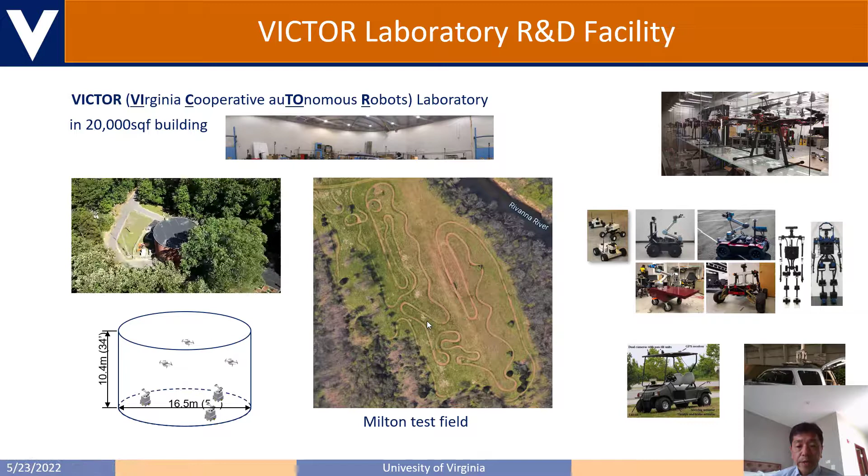Today's talk, I will start by introducing the history and the state of the art of autonomous driving, and finally address the limitations of the current autonomous driving technology.

Following that, I will say why road surface measurement is important for autonomous driving. Structure from motion-based road profiling, a road surface measurement technique, is what I proposed and developed with my graduate students.

I will also present the autonomous defect identification techniques, which we developed using the 3D reconstructed images from the preceding technique. Finally, I will present autonomous driving using road surface measurement.

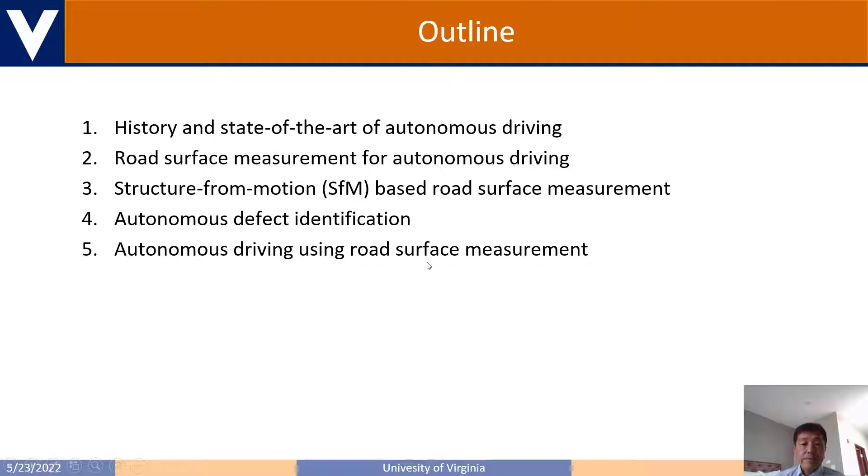So autonomous driving is booming, but in fact it is not new.

By 2000, Komatsu had already introduced the autonomous mining truck into the market, having started the project in the early 1990s. Of course, this is GPS driven.

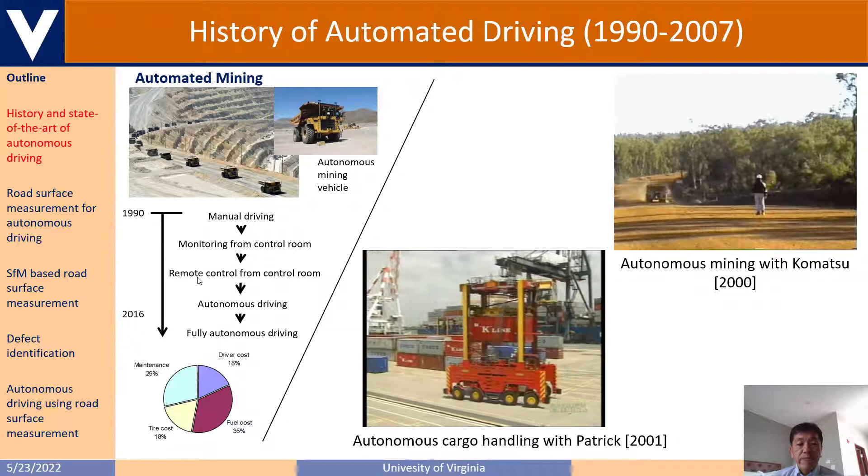It is not fully autonomous, but the idea existed, and there was also advancement. For cars, the technology has been progressing under the name of ADAS.

Lots of technologies, starting from cruise control, adaptive cruise control, automatic emergency brake system, lane keeping assist system, traffic jam assist system. Many technologies have been developed and implemented.

In 2007, the well-known DARPA Urban Challenge was held. Virginia Tech, which I mentioned before I came to University of Virginia, became third in this challenge.

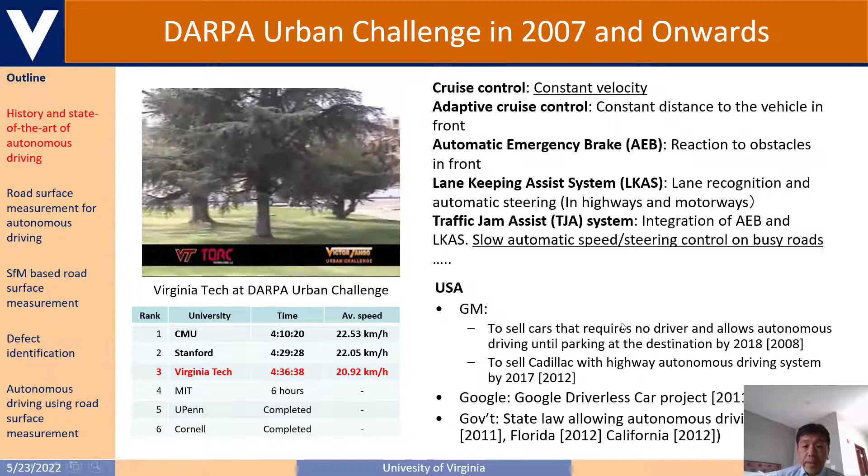And after this 2007 competition, General Motors announced that they would be selling cars requiring no driver, allowing autonomous driving until parking at the destination, by 2018. Of course, it didn't happen, but that's how the autonomous driving boom started.

Needless to say, Google and other IT companies started to join this development, and even the government started to support the development.

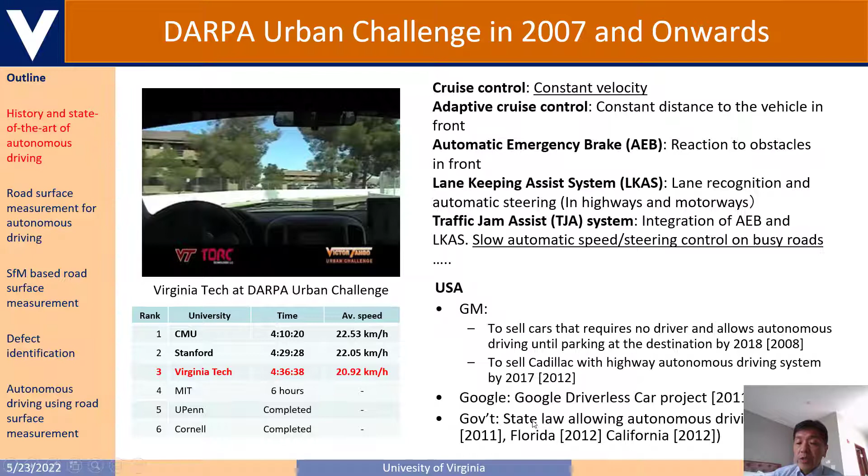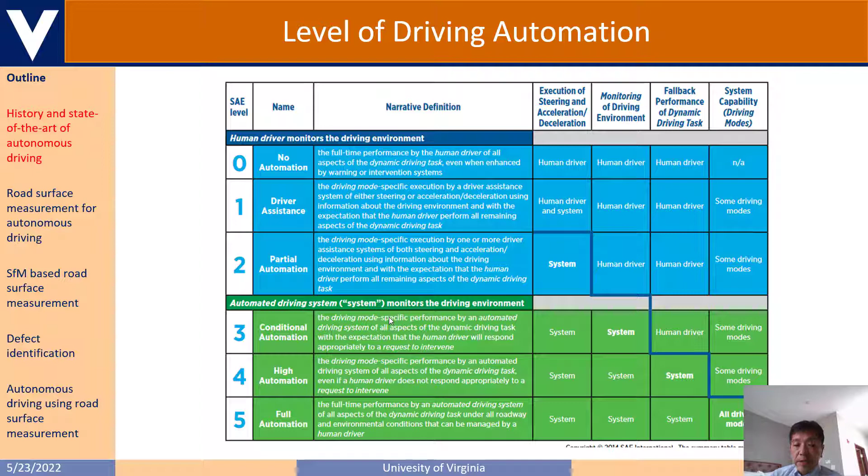I'm here showing the levels of driving automation, and we were really discussing up to level 5. We do not really know where we are at this moment, because achieving autonomous driving in the whole scenario is extremely challenging. There were exaggerated discussions, and now we've started to tone down a little bit. This is also good because we did not know whether we could achieve autonomous driving that fast.

Although we have not been able to achieve fully autonomous driving at all, there has also been progress. But if you observe by dimensions such as what I'm showing here - GPS difficulty, environmental complexity, and speed - what we have been able to demonstrate so far are relatively easy problems.

The reason why we don't see autonomous driving everywhere is because the car moves to all places. The environment could become very complex, or it could even go into tunnels where GPS is not available. For this reason, we are still not close to achieving autonomous driving.

I'm also showing here the environmental complexities in snow and rain. The scene that the camera can see becomes completely different, and we need more sophisticated techniques to perceive the environment.

Industry is taking an approach of conservatively solving one problem after another. As an academic faculty, what we are trying to do is see what technology is going to be needed in the future.

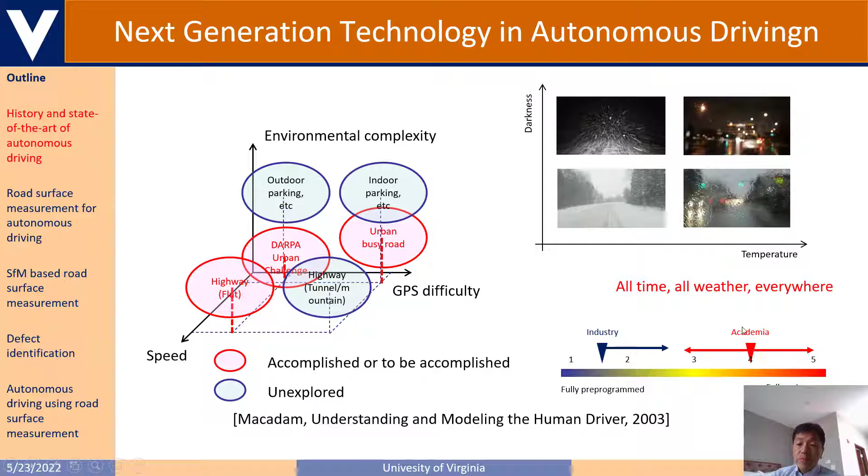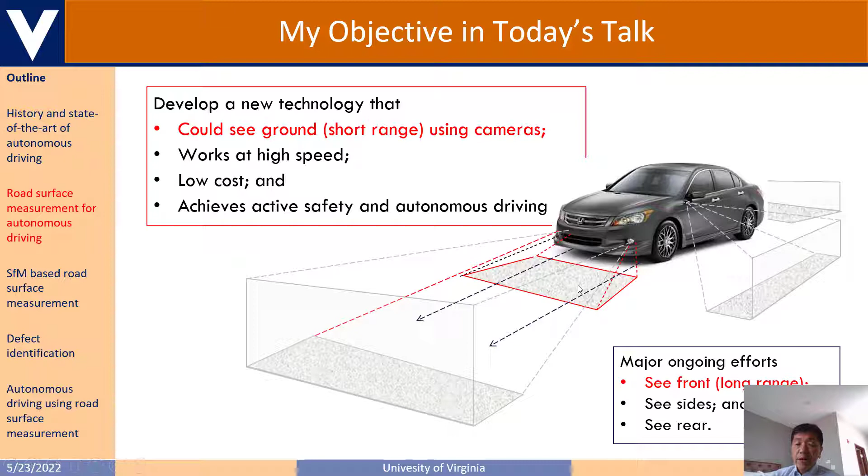So today I'm talking about road surface measurement - that is also one of the things we need to address as technology advances. The clear difference between what industry is doing and what I have been doing is that industry just tries to see front, long range, while what I'm trying to see is the road surface. Seeing the road surface was quite important because cars are in contact with the road, and the performance and safety of the vehicle is heavily dependent on the road surface.

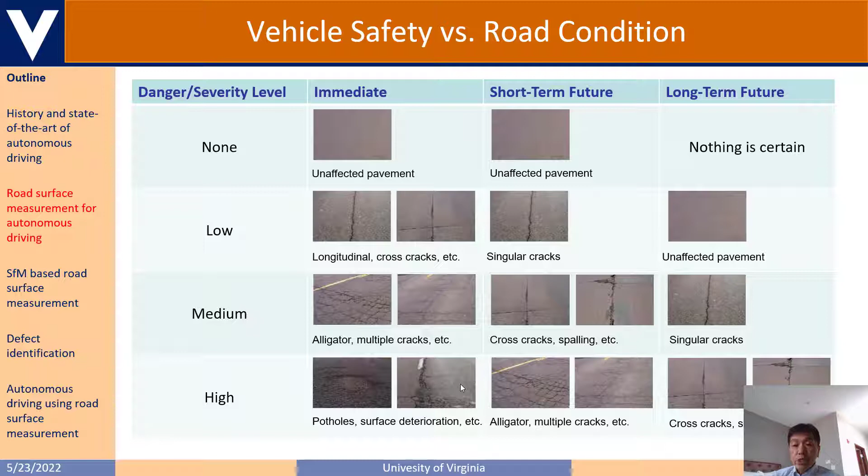So I'm here showing vehicle safety versus road condition. These conditions, of course, change with respect to time, and ultimately ill conditions could cause traffic accidents, risking the life of humans. So obviously we have to be able to detect this so we can repair the road, and at the same time we have to be able to avoid such dangerous conditions.

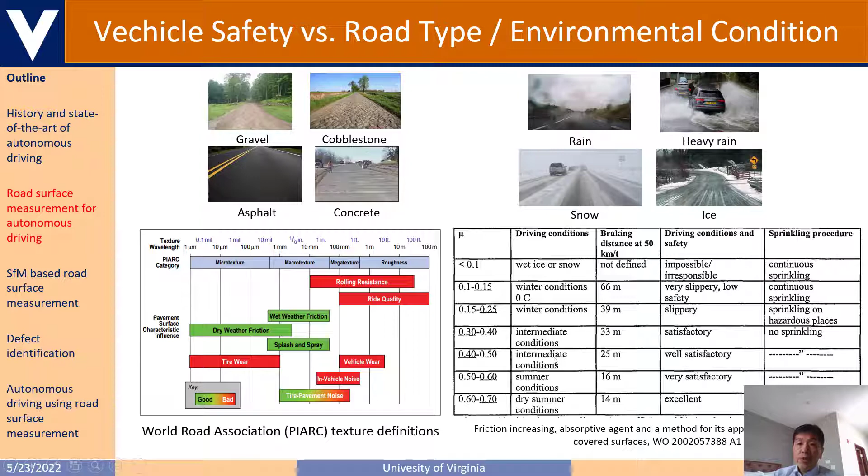It is not only road conditions, but also road type and environmental conditions that affect vehicle safety. On the left-hand side, we see gravel road, cobblestone, asphalt, concrete - each one has a different friction coefficient, and therefore vehicle performance changes. If you also consider rain, snow, or ice, it's not only the dynamic friction coefficient but many parameters that change. For example, the friction coefficient is less than 10% of normal when we see ice or snow on the road.

So identifying road condition and road type is quite important, although current autonomous driving is not focusing on it. Humans identify road conditions using indices that have been developed, and based on this we repair the road or even judge its safety. When we try to do autonomous driving, the robotic vehicle must be able to identify what a human is able to do. So we are using what has been developed to improve our autonomous detection systems.

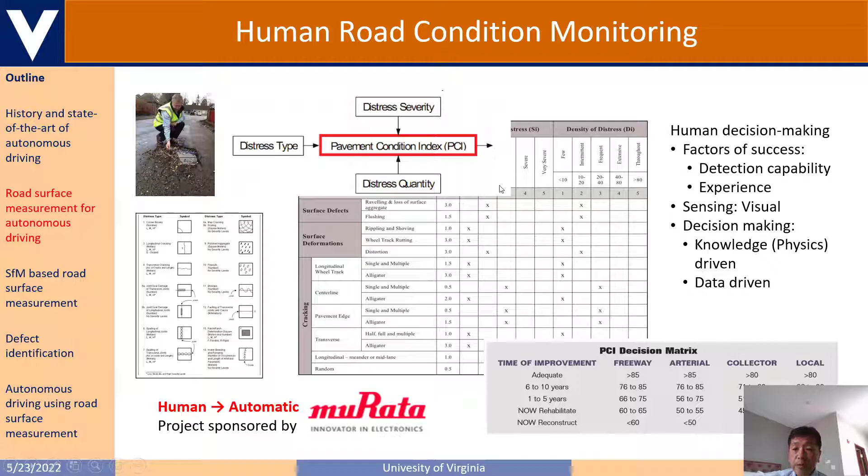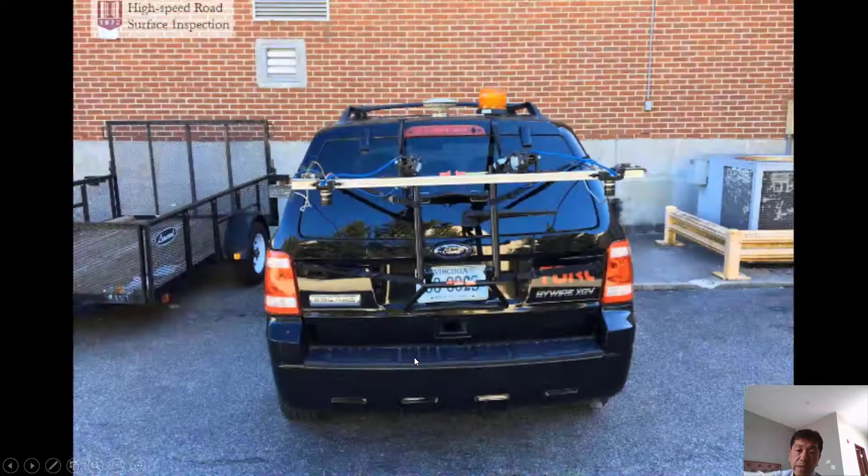Here is the work that I started at Virginia Tech, before I came to UVA. Here we have two cameras attached at the rear side of the vehicle because we are trying to do 3D reconstruction of the road offline. In the case of a highway, where we drive the vehicle at 65 miles per hour, what we see mostly on such a road are potholes.

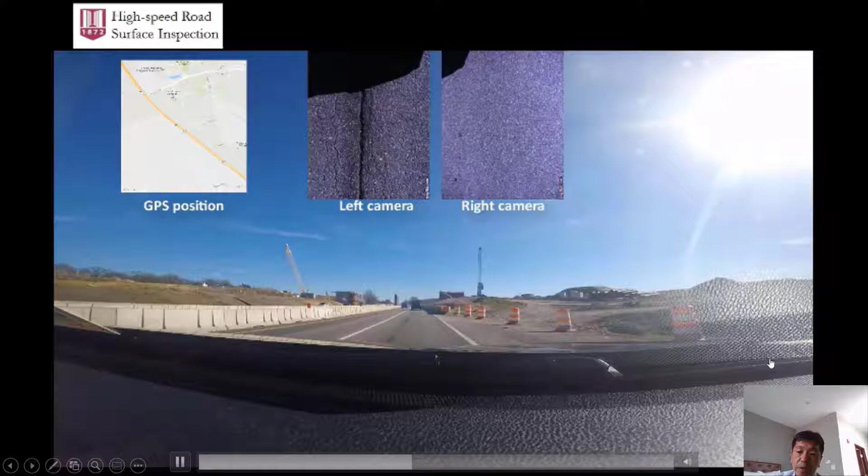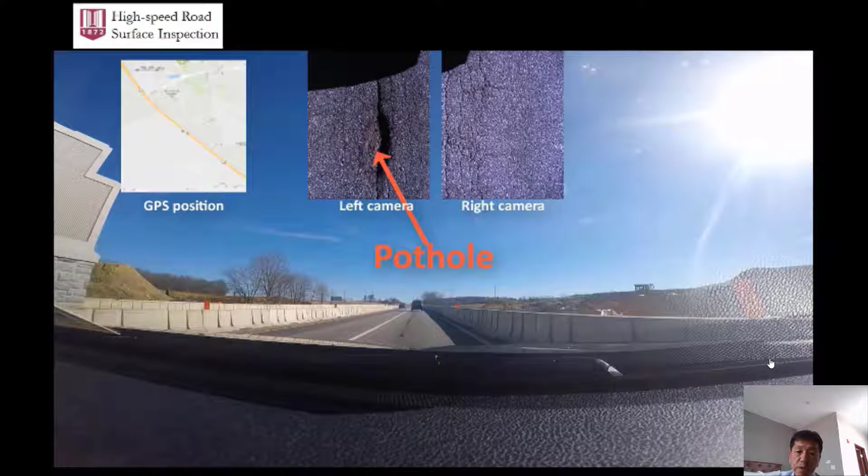It is because there are many trucks and heavy vehicles which heavily use the roads. For this reason, the mechanical pressure creates a lot of potholes.

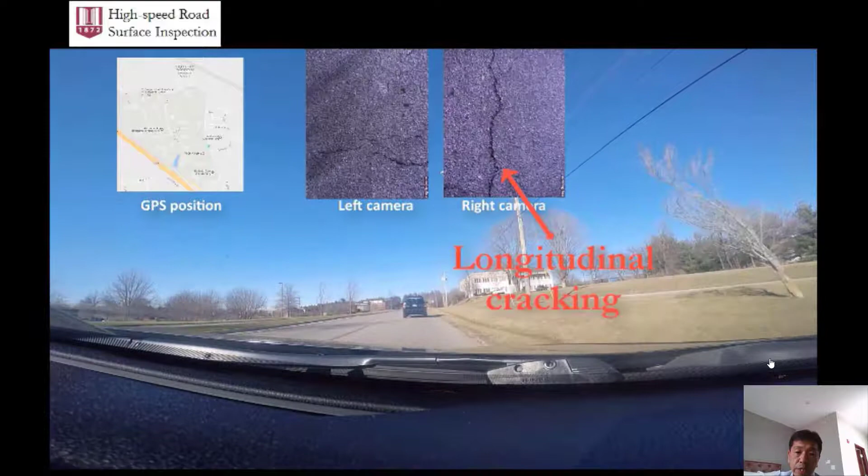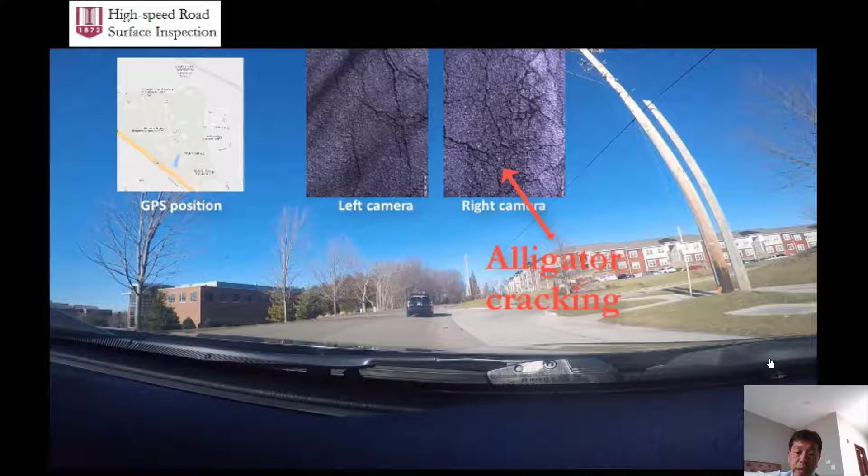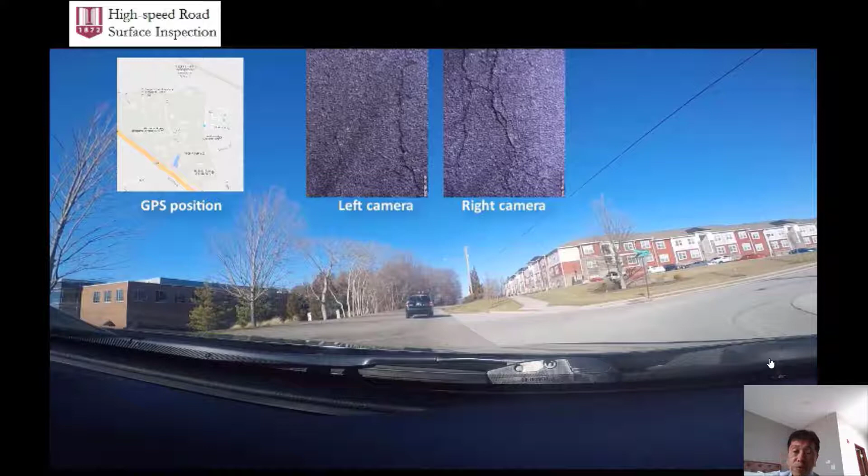When it comes to local roads, you see cracks much more often than potholes. It is because the roads are used by low-speed vehicles, so we do not have to repair frequently and let the cracks exist. But of course the cracks ultimately create potholes, and therefore identifying cracks for local roads also becomes quite important.

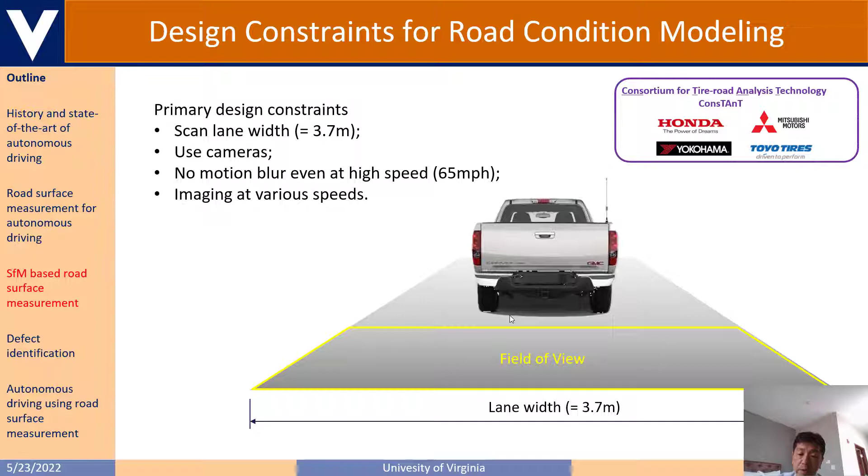In order for us to identify the potholes and cracks, what we first look at is the width of the roads to monitor. When we are driving at 65 miles per hour, the lane widths go up to 3.7 meters. What we find necessary are two cameras attached close to both sides of the vehicle.

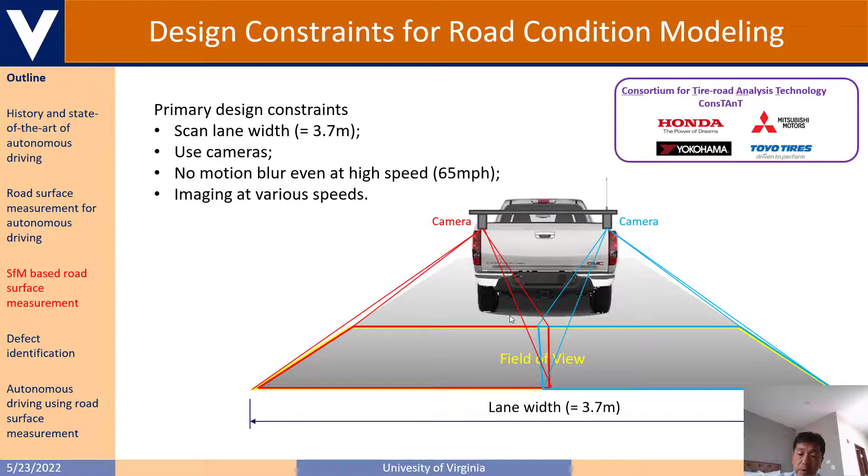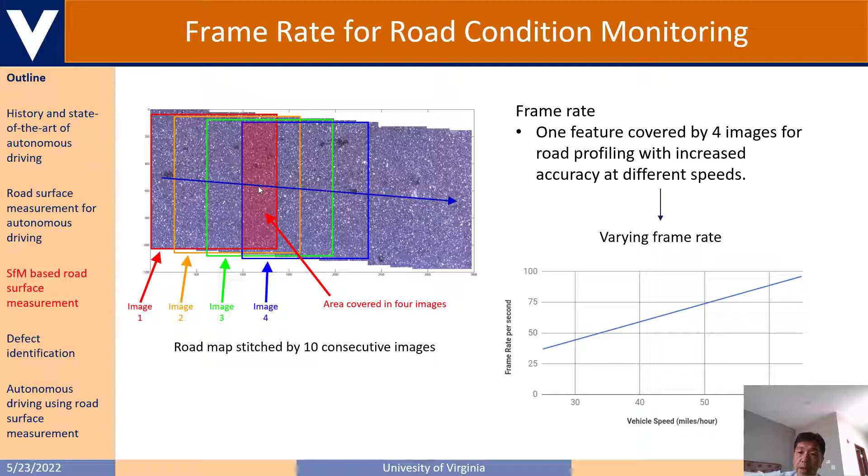The car speed also keeps changing. So we would not like to just keep the frame rate consistent, because when the car is, for example, stopping at a traffic light, we would not like to keep taking identical images. So we control the frame rate dynamically by FPGA.

And further, when you're taking images, sometimes there are trees or buildings which create shade, making the image dark and very difficult to get clear images. So we are also using a strobe to provide additional light, and at the same time make the image finer, since the images will be primarily created when the strobe is on.

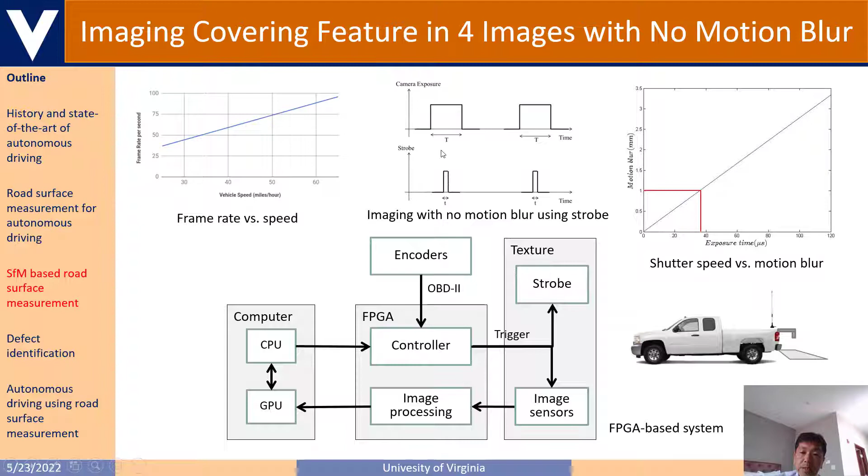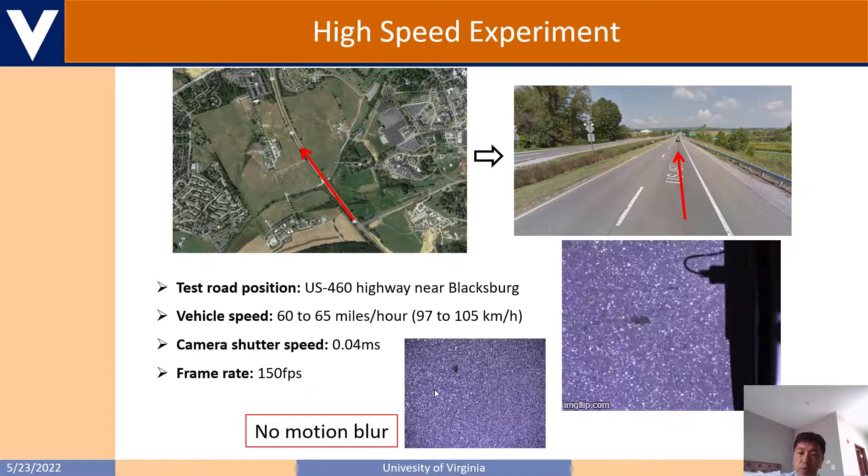And finally, we did a high-speed experiment on the freeway, and were able to, as you can see here, create an image with no motion blur. So this hardware development was the first important progress for us, and then we were able to start moving on to the next step, which is the high precision 3D reconstruction.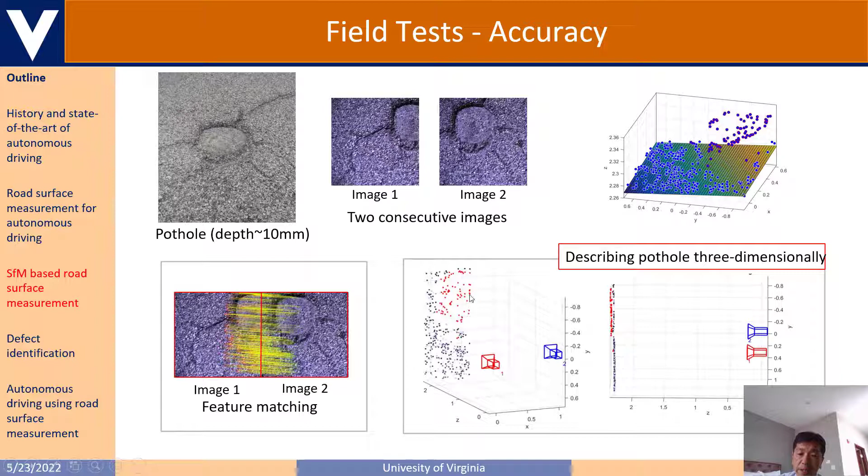By observing the 3D configurations, we are able to automatically identify the potholes. We are able to do the test consecutively on the road.

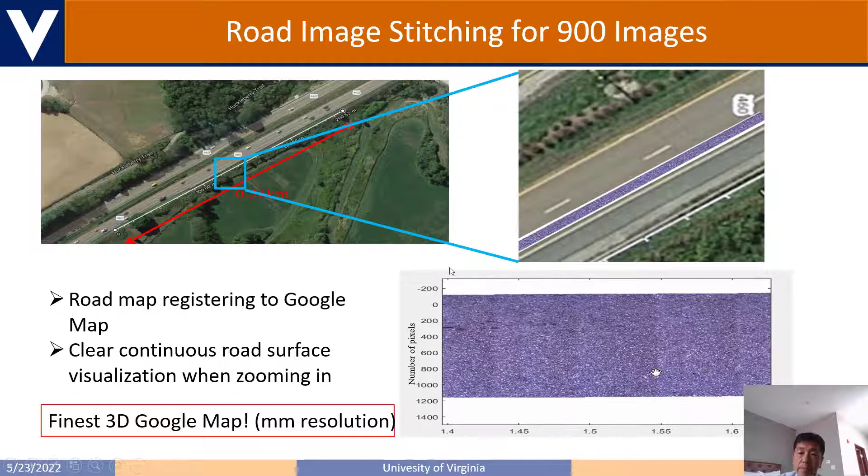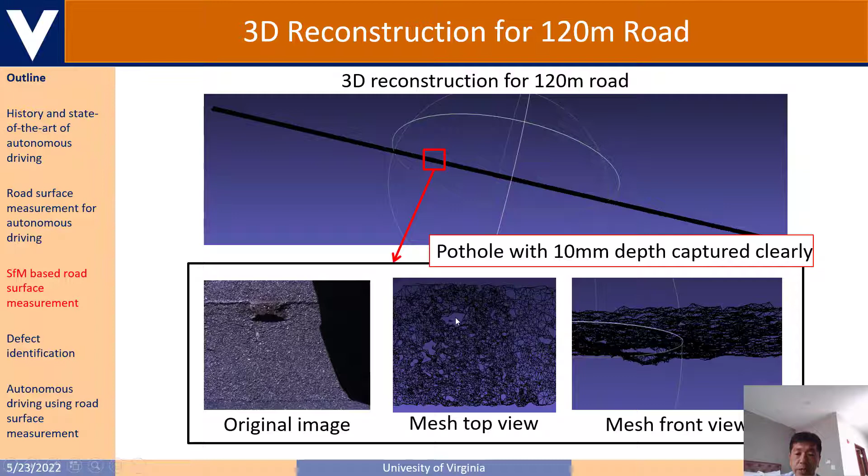So this is the reconstructed images, combining 900 images. And if you just take a shorter stretch of road, and you zoom it, you can see right here that the potholes can be detected by our technique.

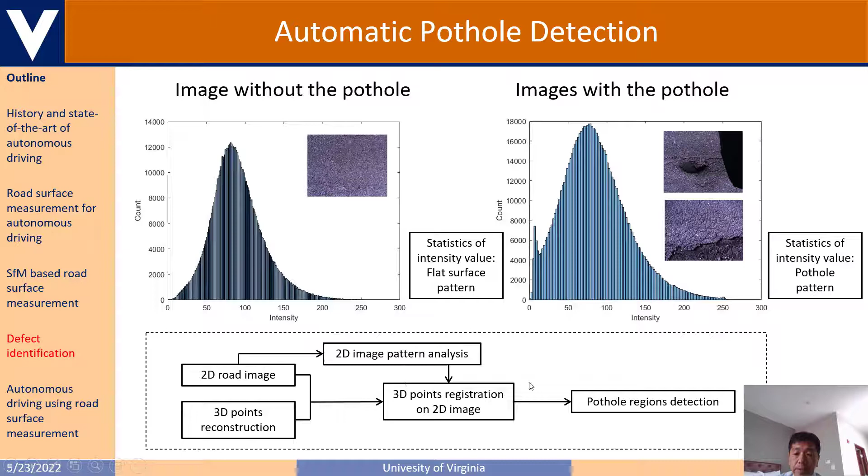The automatic pothole detection is based on histograms and other methods. Ultimately it is able to identify the potholes. We also did tests on various roads, and were successful with positive and negative detections very reliably, concluding that 95% positive results could be achieved.

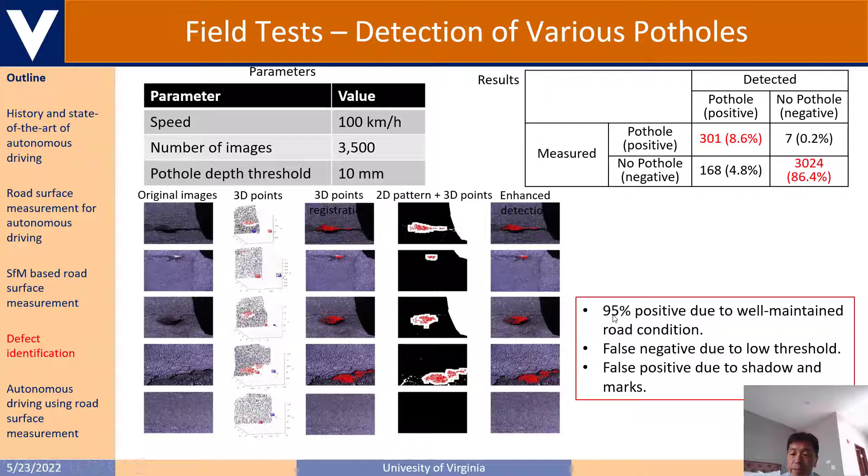In addition to potholes, we are very interested in cracks, but we have to take a completely different approach, because cracks are stochastically characterized, so it is very difficult to three-dimensionally identify. But because water comes in and makes the steep discontinuity very dark, we can easily identify it from 2D images. So we are detecting cracks from 2D images.

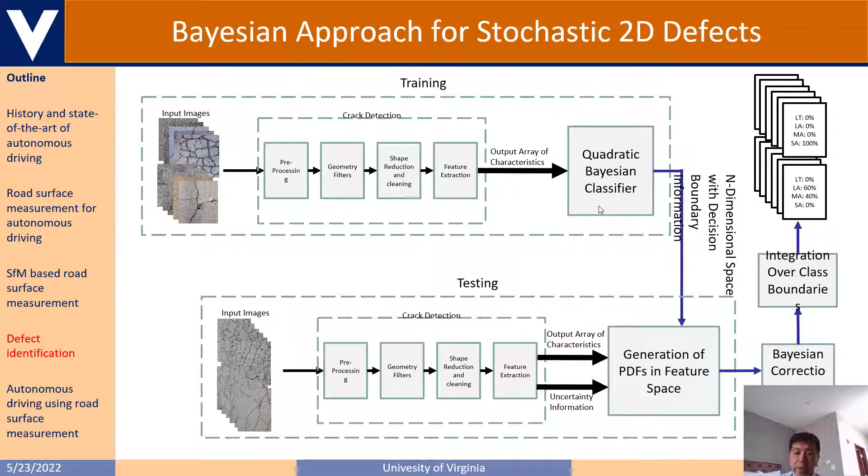I am not describing details here, but we have a Bayesian classifier which can identify the types of cracks and reliably detect existing cracks on the roads. The video here is showing four different types of cracks. Depending on where the classifier data is located, we are able to identify what kind of cracks we see on the road.

And similar to the potholes, needless to say the cracks are more difficult to identify, but we are able to identify the cracks very reliably as well.

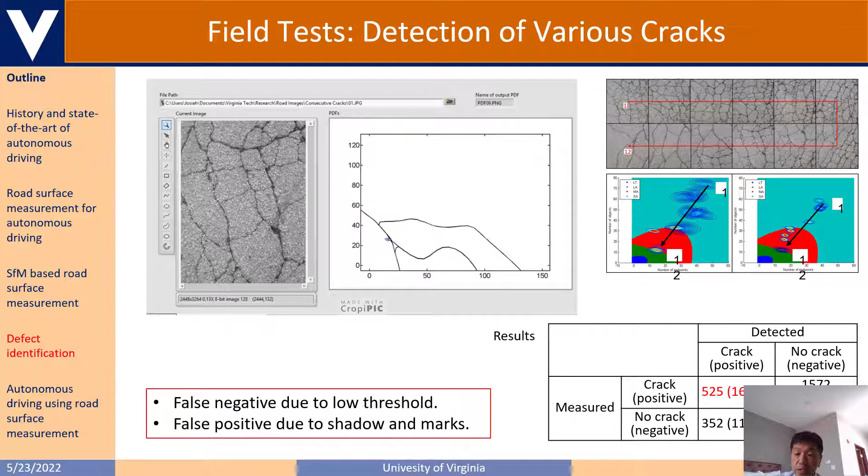So far what I have presented are all offline, and next we need to think how we can apply this to autonomous driving. As I mentioned, current autonomous driving does not look at the road profile. Instead, it looks at and perceives traffic signs and marks, traffic infrastructure excluding roads, and obstacles including cars and pedestrians. But we cannot exclude the roads, since the vehicles are in contact with roads.

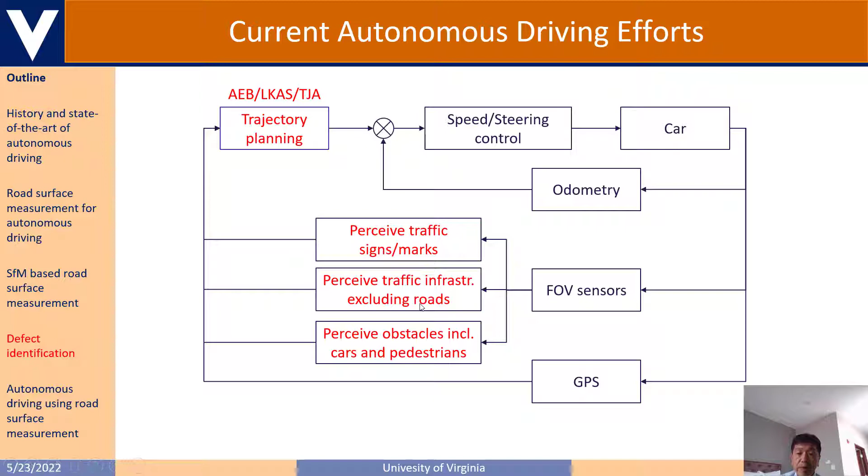What we are doing, therefore, is introducing a capability of perceiving the road profile and conditions, and based on this, we want to change the autonomous strategy, trajectory planning, and also the low-level controls.

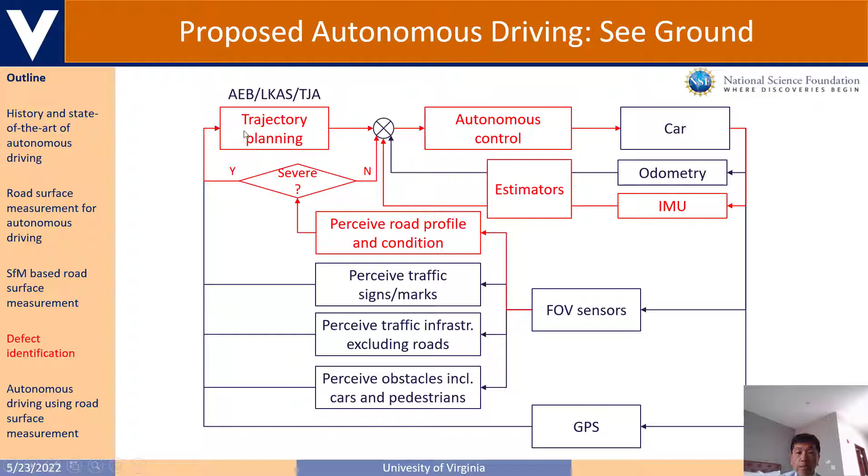To leverage the technologies we developed, for the hardware setting we located two cameras facing front and looking down. Similar to what we did for the offline cases, we introduced the same hardware setup and drove the vehicle.

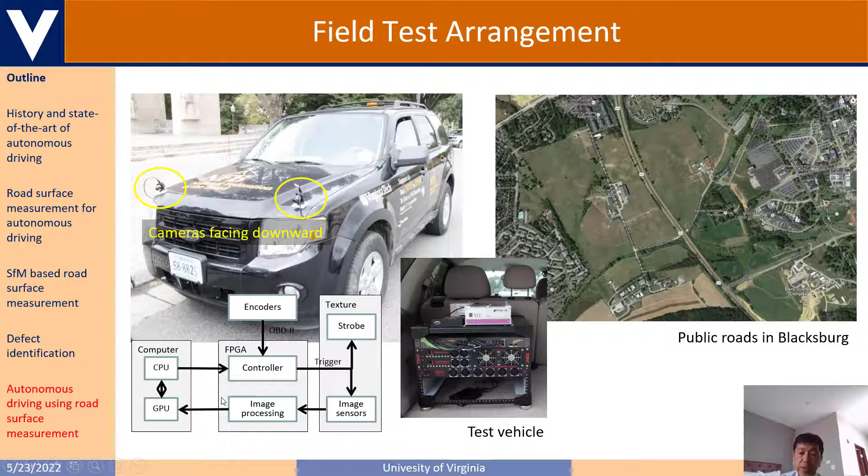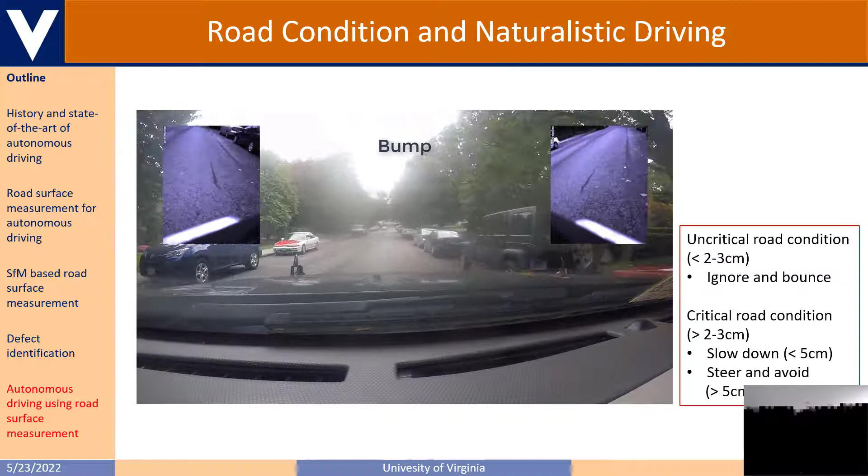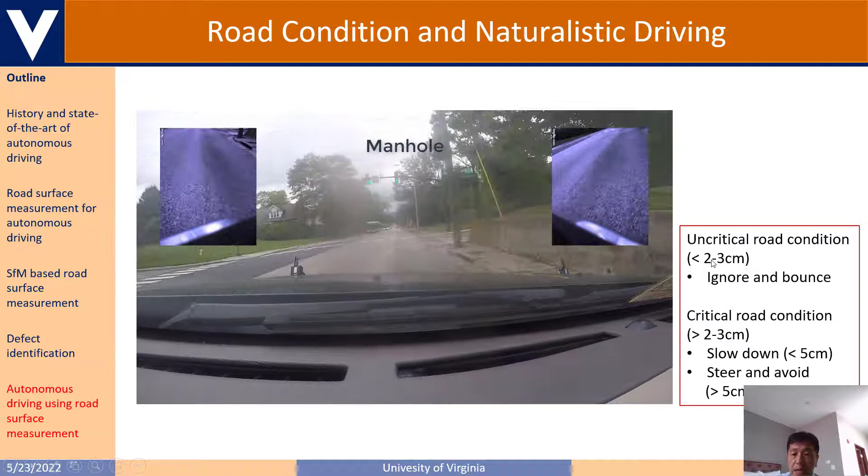When we drive the vehicle on the roads, what we recognize is that when bumps exist, we slow down. We see potholes and we take different reactions. Generally speaking, from naturalistic driving, we found that any defect or artifact less than 2 to 3 centimeters tends to be ignored, and we just bounce over it.

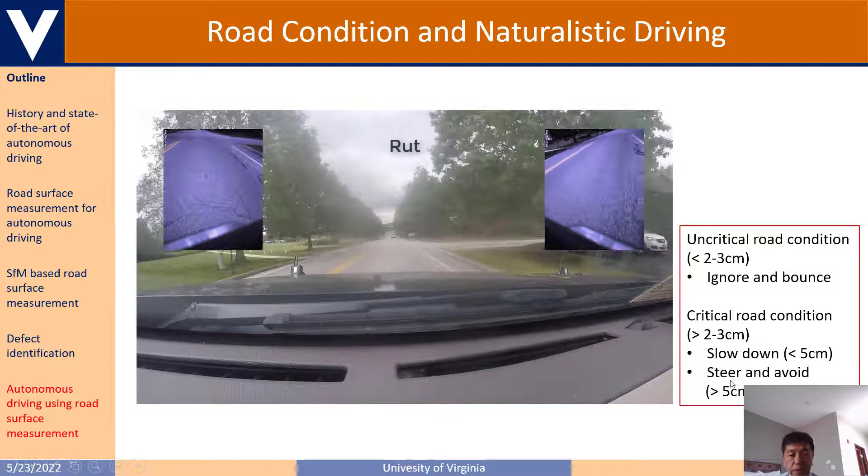If it is more critical, we try to slow down, and if it is very critical, we try to steer and avoid. So our autonomous driving technique also changes, and providing the road condition for this reason is necessary. Indeed, when we see pedestrians, in such cases we stop the vehicle.

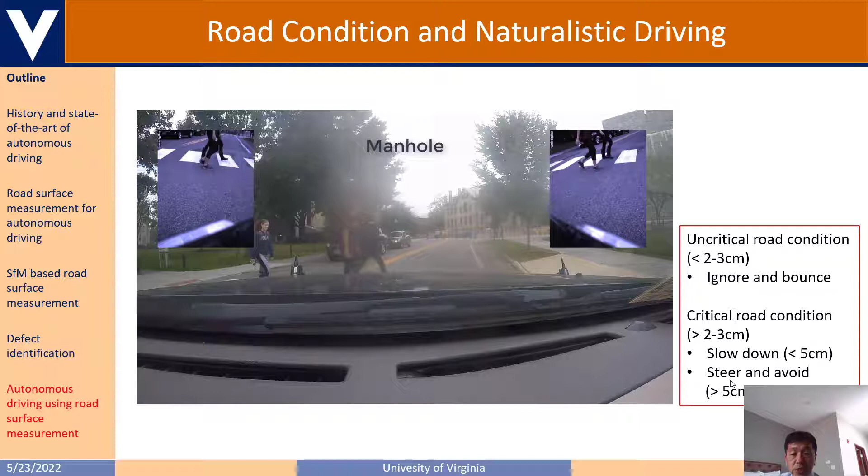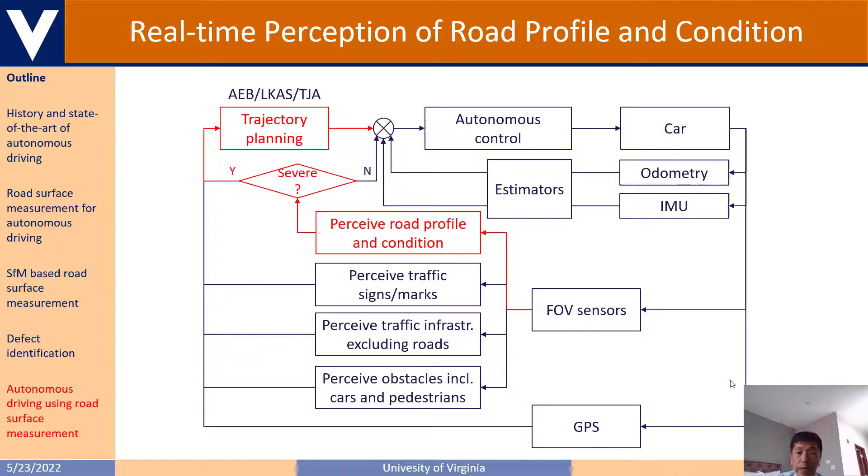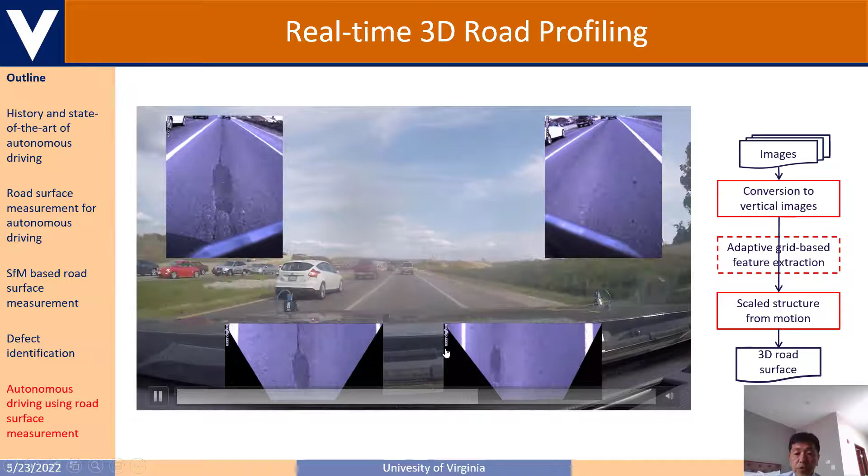Lastly, we were interested in finding out how much we are able to identify the road condition in real time. Here the two images are what we see from the camera. Since it is looking down, first we need to do a transformation and see the images as if we are viewing vertically from the top.

Once we are able to do that, we apply the techniques we developed for pothole and crack measurements. Of course, when trying to see far ahead, the 3D reconstruction accuracy significantly drops, so it is not effective.

But at the same time, what we found is that we are able to detect the pothole well enough so that we are able to avoid it in some cases.

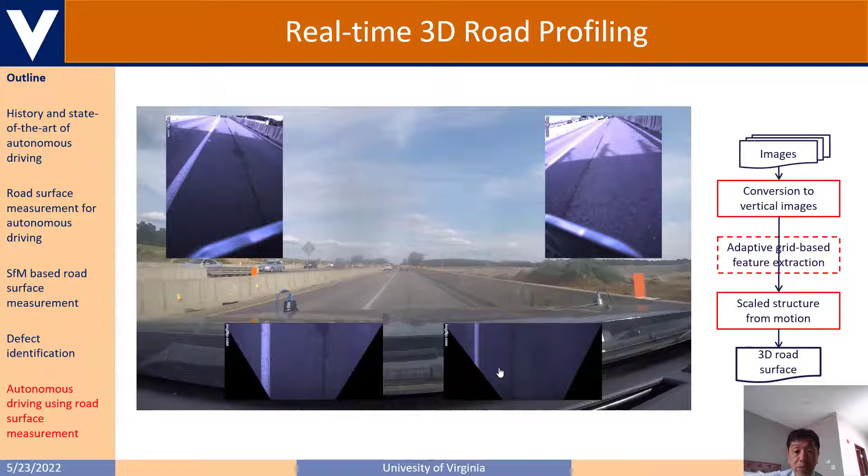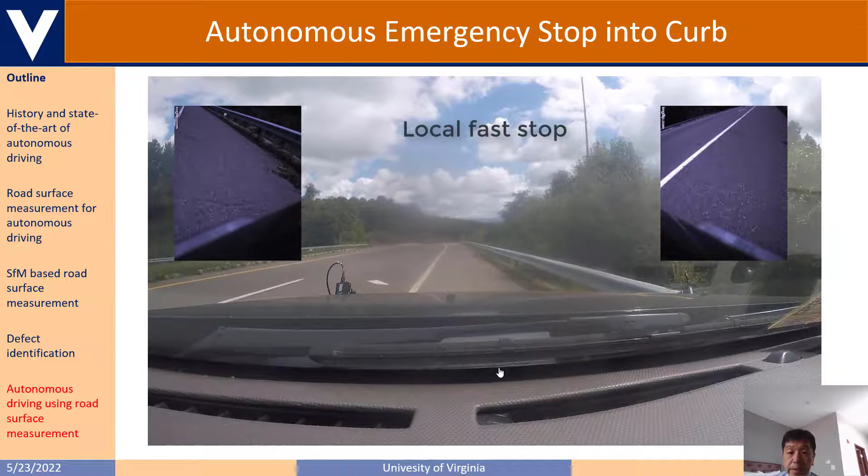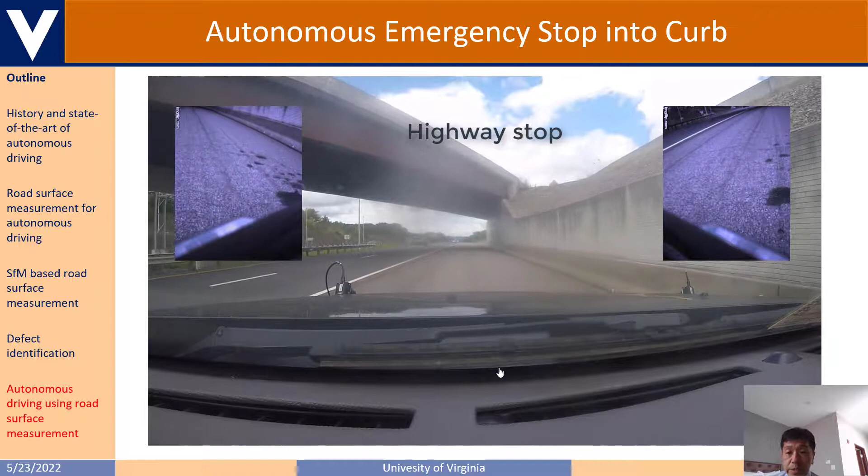One last video I am showing here is an example of autonomous emergency stop into a curb. There are many cases where the driver would not be able to continue driving. In such cases, automated vehicles would like to find a roadside that is safe to have the vehicle stopped. This involves an emergency brake, a hard brake, and the road condition also becomes quite important. The technology we have developed is obviously useful in such scenarios, and we try to incorporate it into autonomous driving.

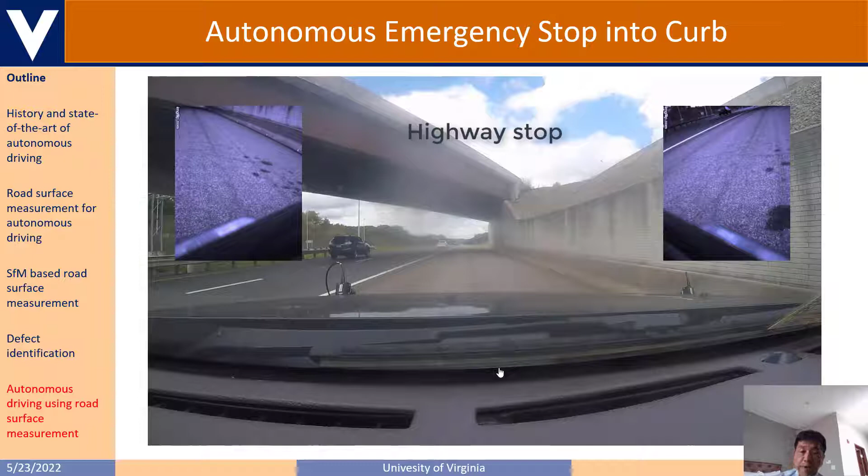I hope that you enjoyed my talk today, and hope to continue the discussions. If you're interested in any of the topics I introduced today, please do not hesitate to contact me.